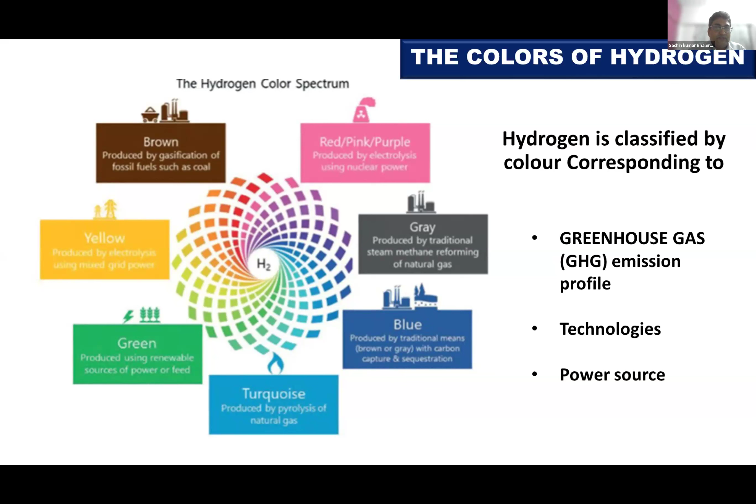Hydrogen is categorized into different types based on the method of its production, and these are referred to by their color codes. Each color represents the environmental impact of hydrogen production and the technology used. I will give you a detailed breakdown of the different hydrogen color codes.

So I'm just pressing next slide. This is in that spectrum here. This is gray hydrogen. So what is gray hydrogen? Gray hydrogen is produced through steam methane reforming, which involves extracting hydrogen from natural gas. So gray hydrogen is derived from natural gas.

It is the most common production method today, with nearly 60% of hydrogen made this way, as the International Energy Agency says. This method releases a significant amount of CO2 into the atmosphere, as the carbon contained in the natural gas is not captured. Gray hydrogen generates significantly lower CO2 emissions than the brown version.

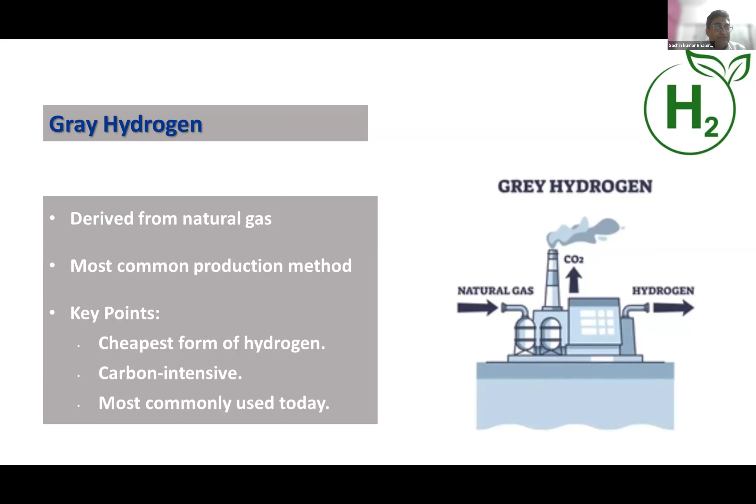The brown version I will explain later, because in the brown version we use coal as an energy source. Gray hydrogen is the least environmentally friendly because it contributes to carbon emissions, making it a fossil fuel based energy source. The key points: it's the cheapest form of hydrogen, carbon intensive, and most commonly used today.

Now on to blue hydrogen. Blue hydrogen is produced the same way as gray hydrogen. The only difference is that we use carbon capture and storage technology to capture the CO2 emissions produced during the hydrogen extraction process and store them underground. So CO2 emissions are mitigated to some extent through CCS, which means carbon capture and storage, making blue hydrogen cleaner than gray hydrogen, though it still involves fossil fuels.

Blue hydrogen is considered a transitional fuel; while it reduces emissions compared to gray hydrogen, it is still based on natural gas. The method of blue and gray is the same, using natural gas, but in blue we use CCS technology, a carbon capturing technology, to capture whatever carbon would go to the climate. In this way we can improve our carbon capturing capacity and improve our climate.

So the key points of this technology: it is cleaner than gray hydrogen due to CCS. It requires significant investment in CCS infrastructure, because we have to build additional infrastructure to capture this carbon, so that is the additional cost. It can still be carbon intensive depending on the effectiveness of the carbon capturing process.

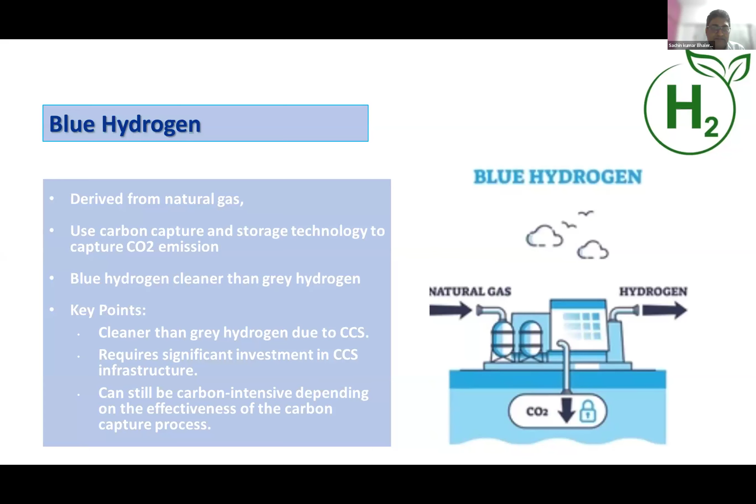Now on to the next one. This is turquoise hydrogen. Turquoise hydrogen gets its name because its production process is somewhere between gray and blue. It uses a method called methane pyrolysis, a process that uses high temperature to break down methane, meaning natural gas, into hydrogen and solid carbon.

The solid carbon can be stored or used in various industries, because when we take the hydrogen, the byproduct is solid carbon, which is used in various industries for different purposes, such as manufacturing carbon products. The latter is a critical raw material with a wide variety of industrial applications, including making car tires, coatings, and batteries. Companies that require carbon can use it there.

The great advantage of this technology is that there are no CO2 emissions to deal with. This method produces no CO2 emissions if the solid carbon is properly stored or utilized, making it a cleaner alternative compared to gray and even blue hydrogen. So we can say this is better than these two. Pyrolysis is considered a promising new technology for producing hydrogen with a lower environmental footprint, especially if the carbon is utilized rather than released into the atmosphere.

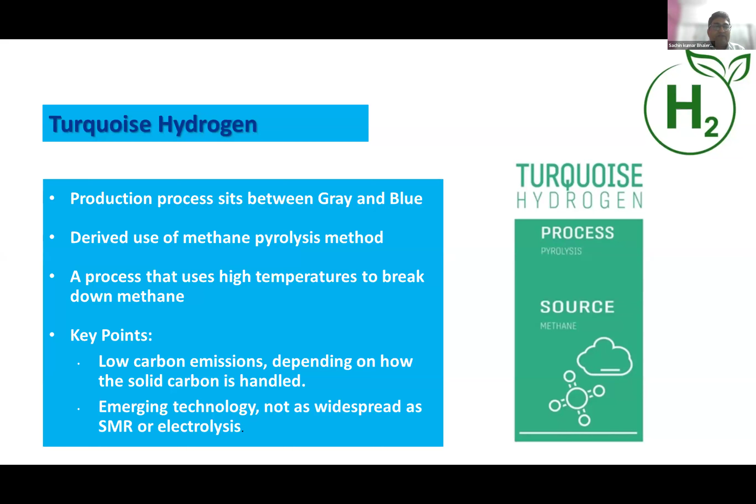So the key points: lower carbon emissions, depending on how the solid carbon is handled. Second, it is an emerging technology, so not as widespread as SMR or electrolysis. Now, next is green hydrogen.

Right now, this is our topic, and this is also one form of hydrogen generated from electricity and the process. So green hydrogen is the holy grail for policymakers, climate activists, and the energy sector. It is made by electrolysis, a process that uses electricity to split water into hydrogen and oxygen. And the electricity must be provided by renewable energy. That is the main important point here.

If the energy is from renewables, such as solar or wind, there are zero carbon emissions. So we say green hydrogen. While production volumes are still low and the costs are high, around 350 projects are underway globally that could shift these economics. So green hydrogen is completely carbon free because the electricity used comes from renewable sources.

Renewable sources meaning what? No CO2 is released during its production. So therefore we say green. So green hydrogen is considered the cleanest form of hydrogen, and it does not contribute to carbon emissions. It plays a significant role in the decarbonization of industries and sectors like transportation, power generation, and heavy industries.

And here are the key points: it is the most environmentally friendly, requires abundant renewable energy for production, and has higher production cost due to the need for renewable electricity and electrolysis equipment.

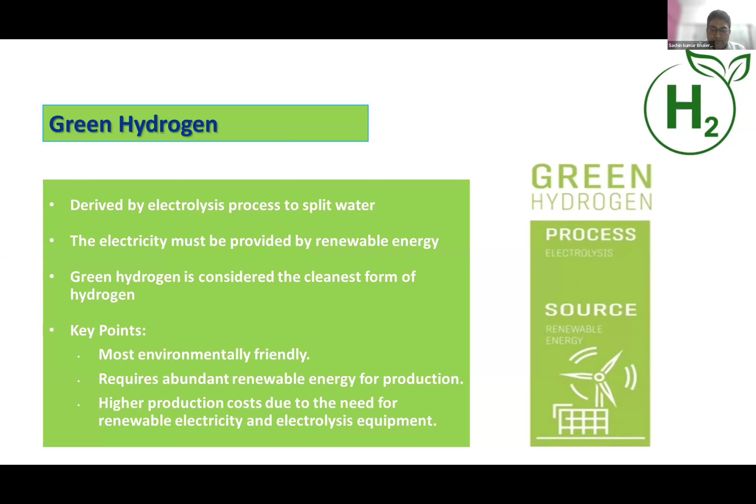Yellow hydrogen. So yellow hydrogen typically refers to hydrogen made using electrolysis powered by solar energy. We can say solar, or specifically grid energy. So grid energy means what? That in a grid, we can connect both renewable as well as our traditional methods, where we generate electricity from fossil fuels.

So both these generating stations give power to the grid, and if we take the power supply from the grid and use it for this electrolysis process, we call it yellow hydrogen. However, it is sometimes also used to describe electrolyzed hydrogen created from a mix of renewable and fossil fuel power. So yellow hydrogen does not have a strict technical definition, but it typically implies the use of grid-connected electricity in the electrolysis process.

The key feature of yellow hydrogen is that it uses electricity from public or national power grids. So the grid energy can come from a variety of sources, including renewables or non-renewable sources like coal, natural gas, and nuclear. And for renewables, we say solar, wind, and hydro. Those come under the renewables.

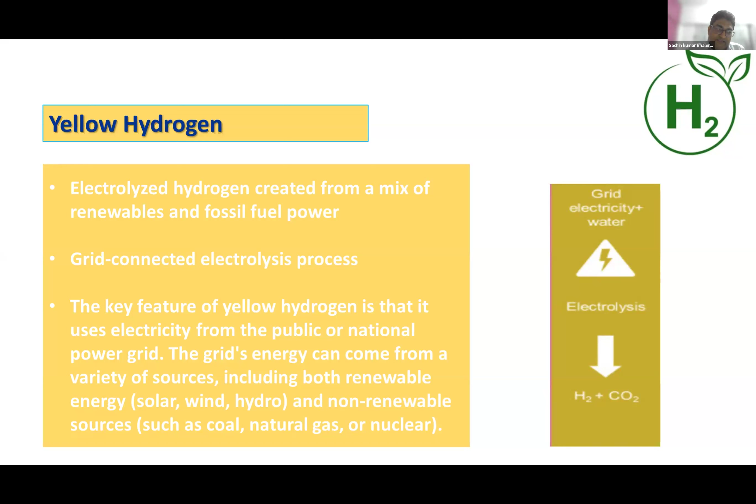So therefore, yellow hydrogen represents the form of hydrogen that is produced through electrolysis powered by the electricity grid. Its environmental impact depends on the energy mix of the grid, and it offers a transitional pathway towards cleaner hydrogen production as the grid decarbonizes. So that's yellow.

And now brown hydrogen. Brown hydrogen, as discussed earlier, uses coal. So brown hydrogen represents the traditional process of making hydrogen, which uses either black or brown coal and is produced using coal gasification, a process where coal is heated to produce hydrogen and carbon monoxide. The carbon monoxide is then further processed to produce hydrogen.

So brown hydrogen is very carbon intensive, as coal is a fossil fuel that emits large quantities of CO2 in this process. So this one produces higher CO2 compared to all the others. This is the most environmentally harmful method of hydrogen production, similar to gray hydrogen, but more polluting due to the use of coal. In 2020, around a fifth of hydrogen gas was still made using coal.

According to the International Energy Agency, IEA. And here are the key points: it is the most polluting form of hydrogen, uses coal, which is one of the most carbon-intensive fossil fuels, and is not commonly used due to its environmental impact.

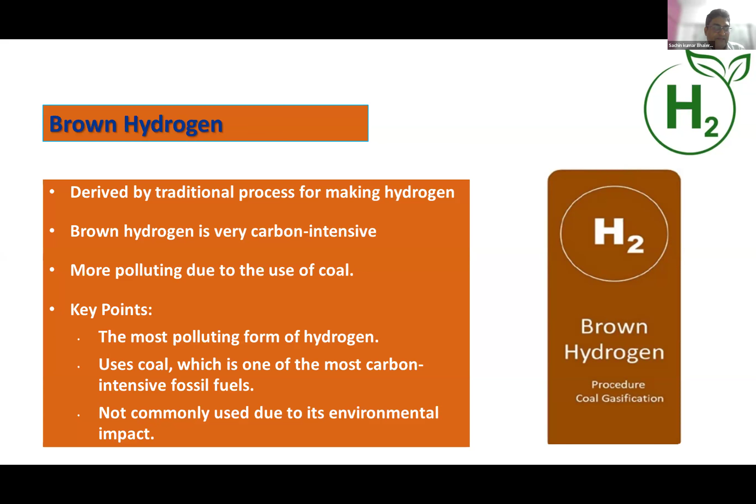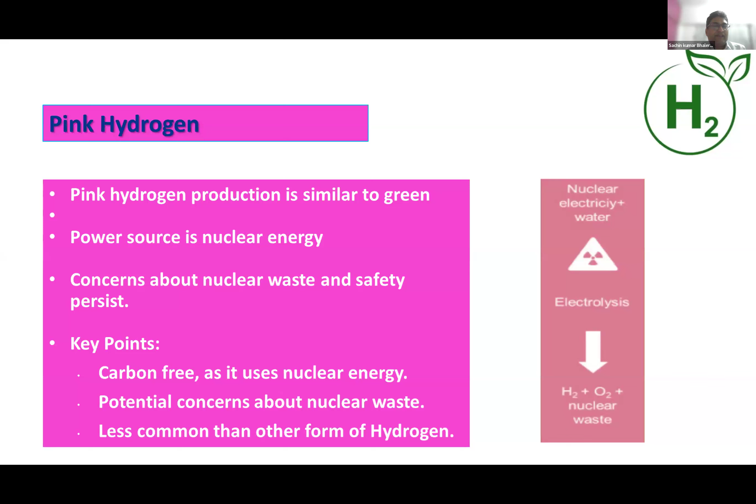So each color of hydrogen represents a different production method with varying levels of environmental impact. Green hydrogen is the cleanest and most sustainable option, but it is also the most expensive. Other types like blue and turquoise hydrogen offer intermediate solutions with lower emissions, while gray and brown hydrogen are highly polluting. As the world moves towards decarbonization, green hydrogen is seen as the future of hydrogen production.

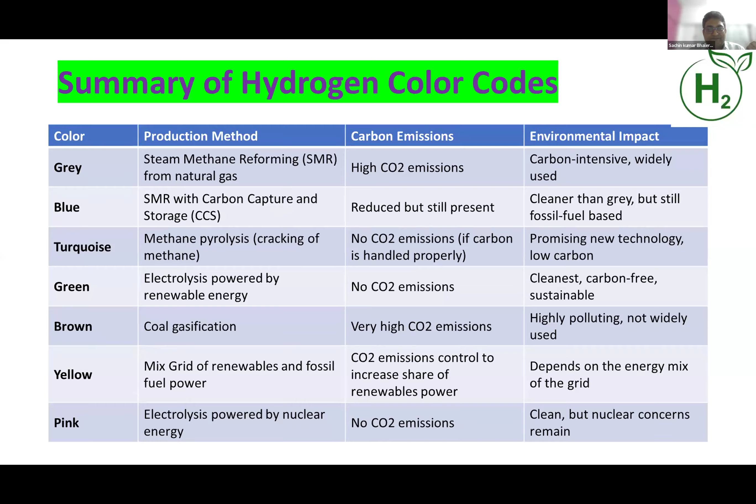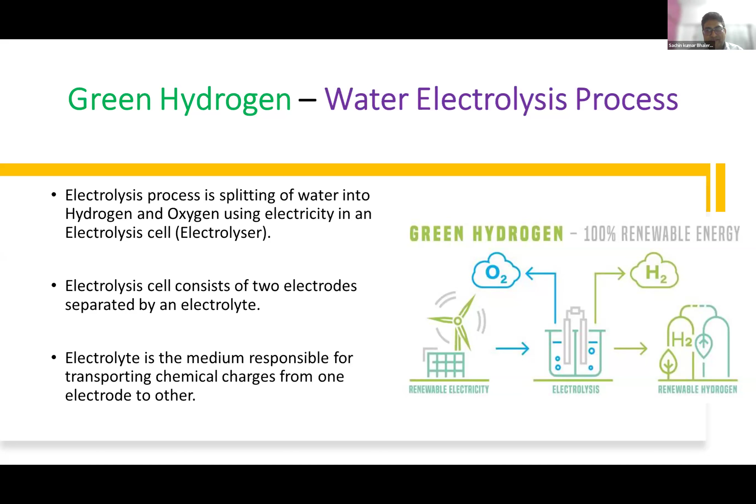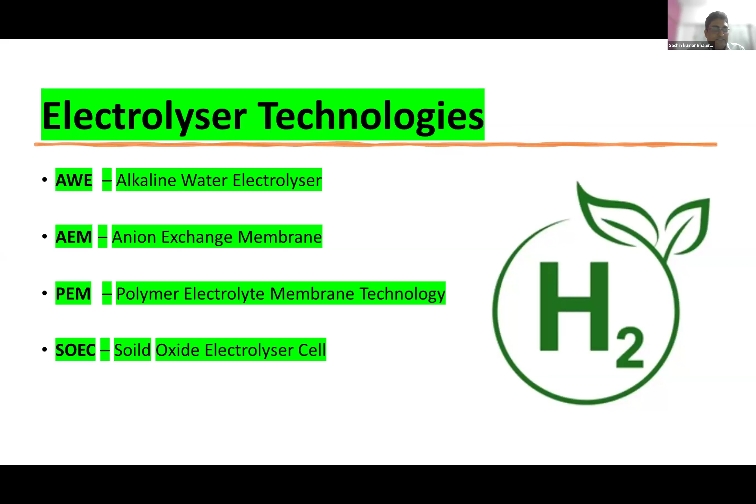Based on electrolysis, we have some technologies we are using to generate green hydrogen. There are four technologies, shown on my screen: alkaline water electrolyzers; second, AEM, anion exchange membrane; PEM, polymer electrolyte membrane technology; and SOEC, solid oxide electrolyzer cell. Let's go one by one to discuss how each technology is used and works.

Alkaline water electrolysis, AWE, is the most mature commercial water electrolysis technology. It is an established technology for industrial hydrogen production. The alkaline water electrolysis phenomenon was first introduced by Troostwijk and Deiman in the year 1789. After several developments, in 1939 the first industrial large-scale alkaline water electrolyzer plant, with a capacity of 10,000 normal cubic meters per hour of hydrogen production, went into operation.

Alkaline water electrolyzers operate at lower temperature, 30 to 80 degrees Celsius, with a concentrated alkaline solution. Moreover, alkaline water electrolyzers have nickel-coated stainless steel electrodes, and asbestos or zirconium oxide-based diaphragms are used as a separator. Alkaline water electrolysis is a favorable system designed for large-scale applications. AWE is an electrochemical water splitting technique in the presence of electricity.

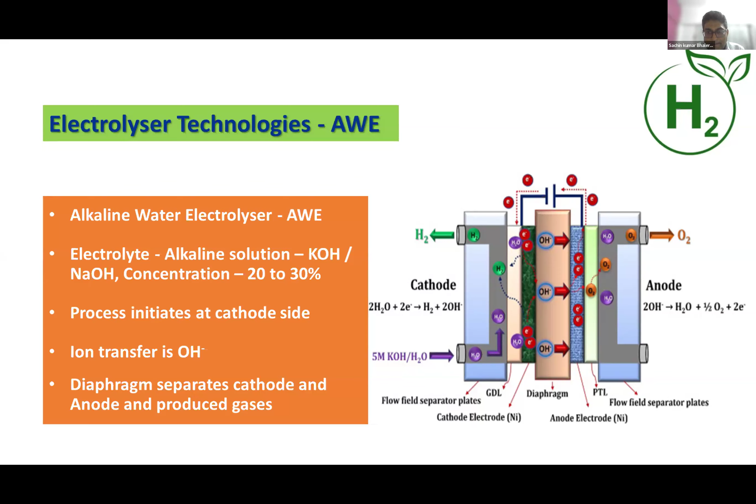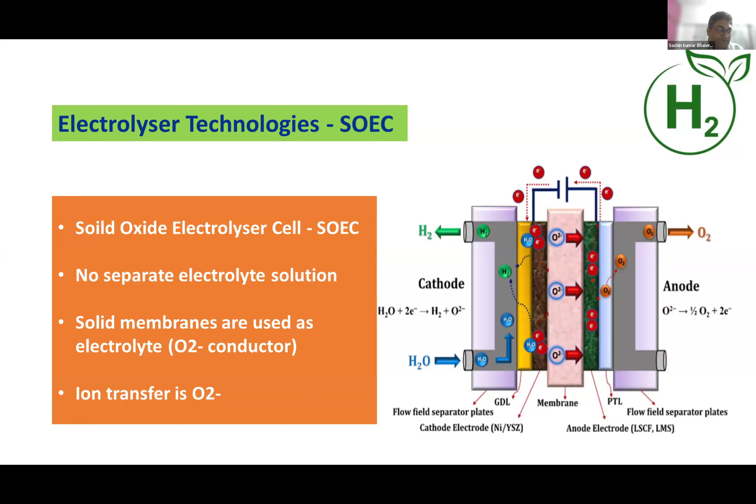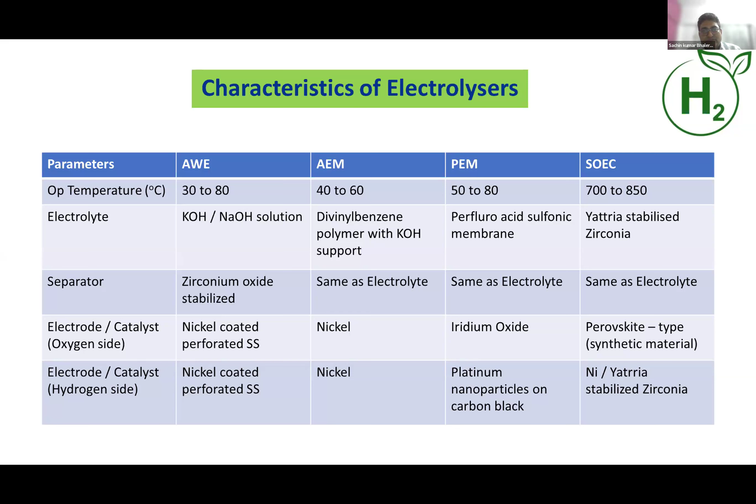and the next slide, here I just specify the characteristics of electrolyzers based on their operating temperature, electrolyte separators, and then the electrodes, anode and cathode side. So here, same things we discussed, and I just prepared the tables to give a brief idea about the characteristics of electrolyzers. And the advantages and disadvantages we already discussed. So AWE is commercialized, same as PEM, also pretty much commercialized. And the SOEC is partly commercialized, but AEM is not yet.

The energy efficiency of AWE is lesser than all these three. The remaining three have 90% energy efficiency. From a metallurgy point of view, non-noble metals are used in AWE, but PEM uses special material, and SOEC is non-noble material, same as AEM. And from the purity point of view, all are highly purified except AWE. And durability is higher for AWE, that's the commercialized process, it has higher durability as compared to the others. Yes.

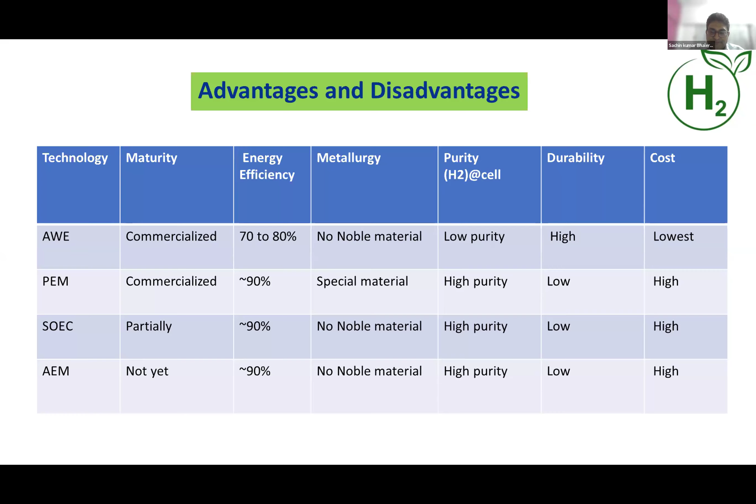Now I just go on to hydrogen storage. Sorry, change. Yeah. So hydrogen storage is a critical aspect of the hydrogen economy, as it allows hydrogen to be efficiently stored for later use in various applications such as energy storage, transportation, and industrial processes. Due to hydrogen's low volumetric energy density in its gaseous form, effective storage methods are necessary to maximize its potential as a clean energy carrier. So there are several methods for storing hydrogen, each with its own advantages, challenges, and applications. These methods are typically categorized into physical storage, chemical storage, and storage using physical transportation.

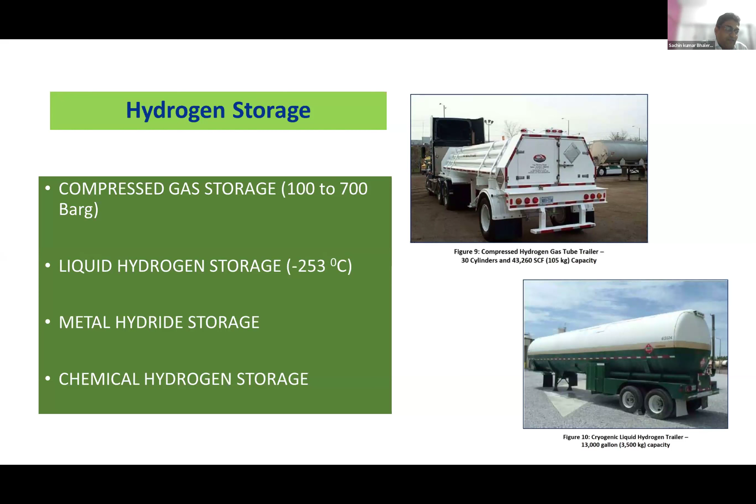So second, if we are storing it, then we also require transportation. We have to transport hydrogen gas properly and safely to the industry and wherever it is required. So transportation is a key challenge and area of focus in the hydrogen economy, particularly as hydrogen is a vital clean energy carrier, because hydrogen is typically produced in one location, such as large scale industrial sites or renewable energy hubs, and consumed in another, for example fuel cell vehicles or industrial facilities where the hydrogen is required. Effective methods for transporting hydrogen are essential for enabling widespread use.

So there are several methods of hydrogen transportation, each with its own advantages, challenges, and applications. The methods can generally be categorized into gas phase transportation, liquid phase transportation, and chemical transportation. So transportation as compressed hydrogen gas. That is because we have the storage arrangement, and based on the storage we have to transport it. So first is compressed hydrogen gas, and how we can transfer it. Hydrogen is transported as a high pressure gas in cylinders or pipelines. For transportation purposes, hydrogen is typically compressed to a pressure of 200 to 700 bar, depending on the mode of transport. So the mode of transport is very important.

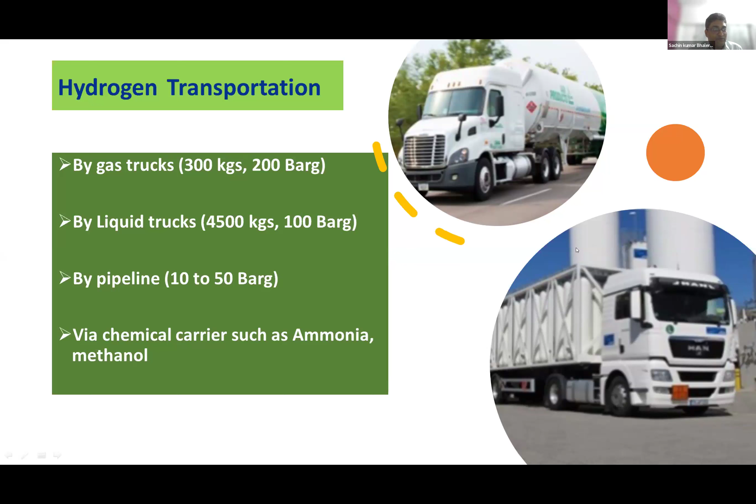And the conclusion is that hydrogen transportation is vital to the success of the hydrogen economy, and a combination of methods will likely be used depending on the application and the region. While compressed hydrogen or liquid hydrogen are currently the most commonly used methods for short and long distance transportation, emerging technologies such as chemical carriers and metal hydrides could play a significant role in enabling more efficient, safe, and cost effective hydrogen transport in the future. So in future we will develop these chemical and hydride storage and

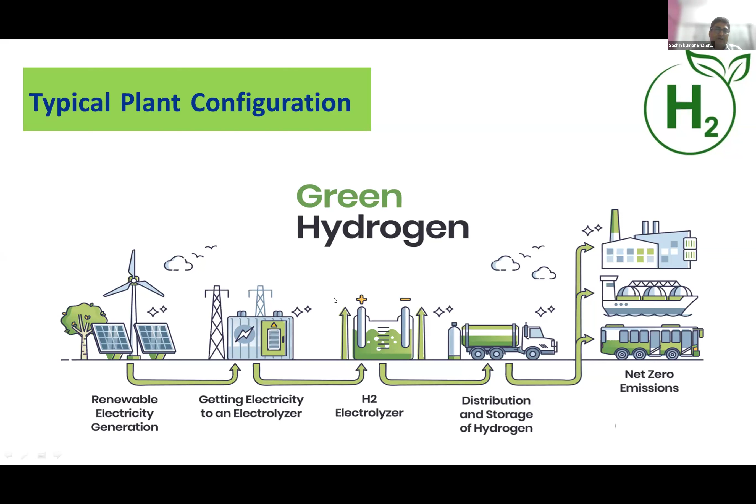transportation processes. In the next slide, I show the typical plant configuration, how a hydrogen plant is configured. This is just a flow diagram. Based on our green hydrogen definition, we require renewable electricity, like the windmills and solar panels shown here. Renewable energy goes to the local utility substation, which supplies power to the electrolyzers, based on the design we select. The electrolyzer generates hydrogen, which is stored and transported to end consumers like factories, ships, and vehicles. So this is a basic flow diagram of how green hydrogen is generated and goes to end consumers.

And at the end, some good words from Dr. Fatih Birol, Executive Director, International Energy Agency: hydrogen is today enjoying unprecedented momentum. The world should not miss this unique chance to make hydrogen an important part of our clean and secure energy future.